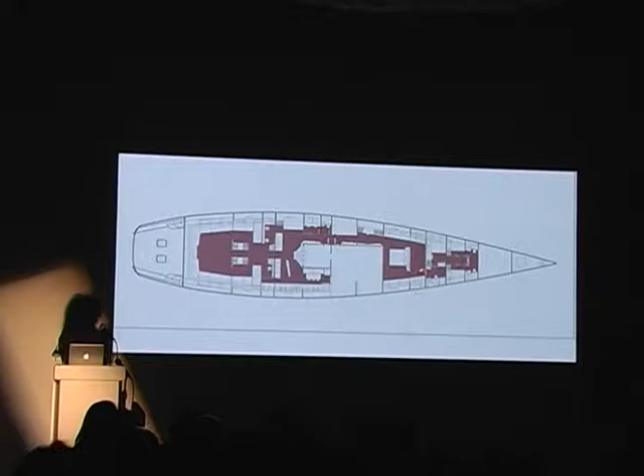Because what I don't like in a boat, usually, is the little corridors, turning and very narrow, where you have your body compressed inside. So I wanted to open the space inside. So all the furniture, all the cupboards of the boat are on the back of the body inside, and all the space is open.

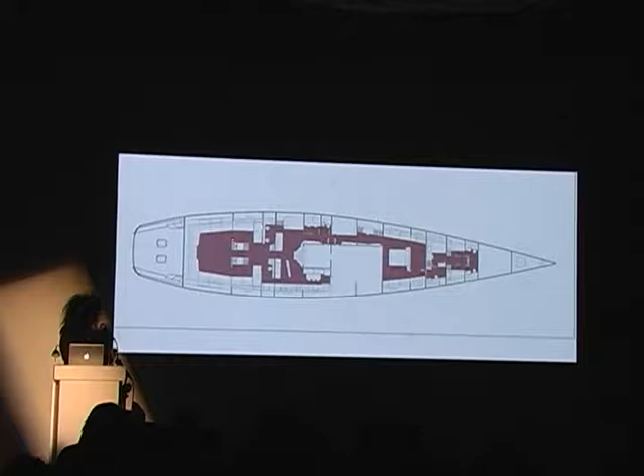We have the engine rooms here, the main bedroom here with the bathroom on the back, with the bathtub inside the floor, with fluidity and a sliding partition between. This is one guest cabin with a sliding partition inside this wall. This is the kitchen, with a sliding partition inside this wall. Another guest cabin is here, another one is here, and this is the salon, the living room.

You know, this is really, really, I like it. For me, it was holidays to work on that.

So I go back 15 years ago, when we did this installation in Grenoble in the Contemporary Art Center, an installation to express the way our architecture plays with space. So we called it Hypertension, because for us, hypertension is the way you play with compression or dilatation of the space.

We were playing with the ambiguity of being outside, going inside, and when you start to be inside, you don't know if you are already inside or if you are still outside, because of opening the walls, playing with the ambiguity of thickness and thinness, no, what can we say.

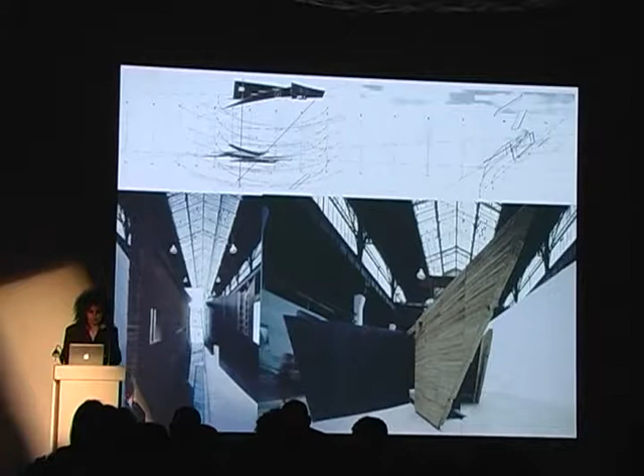So we played with that a little bit when we did this Banque Populaire de l'Ouest in '90, with this question of how to make a transition from the outside, which is the countryside outside the city. In front of this building we have fields and cows and a little river, and inside where people will be working.

So in between them we wanted to have a transition, and we had to resolve some technical questions. This facade is facing south, and people are working on computers behind. So we need to protect the people from the light, from the heating, because the client didn't want air conditioning, since it's outside in the countryside.

He wanted windows that open, to make people able to open the windows, to look out and feel the fresh air. So we need to protect this facade. We built a structure 2 meters before the glass facade, and this structure, which is seen from far and becomes like a forest of steel when you come nearby, is a gallery.

Inside this structure we have sunscreens which go down after activating a solar cell. Sorry for my English sometimes.

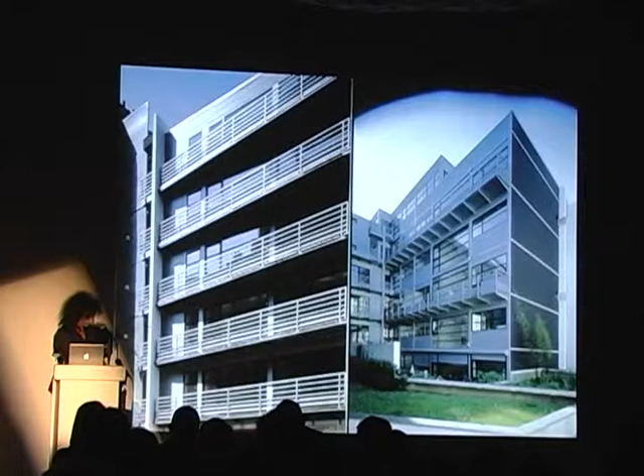In this little social housing building, it's social because it's very low price. We played with this question of having a space inside and outside. In this slide, this panel is perforated, and it's just the facade of the staircase.

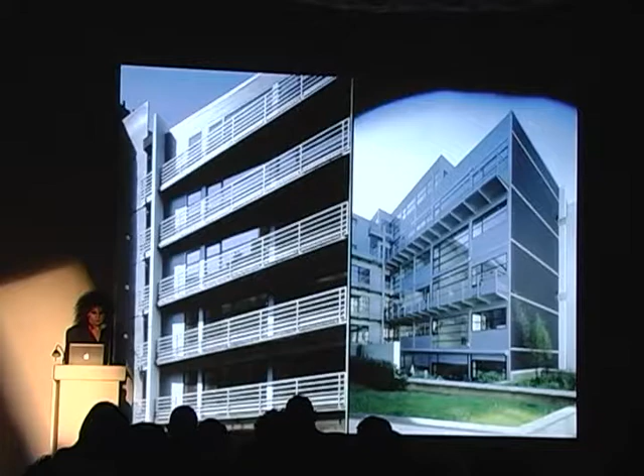When you go inside the building, you push the door and enter this little hall. It's little because it's a very small building, 11 flats, and the space of this hall is 6 or 7 square meters. But it seems bigger because of the curve, the mirror at the end, and the glass door to the courtyard.

But it's an inside space, because when you open the door, you go inside. Behind this blue column in the middle, you have the beginning of the staircase. The staircase goes directly up and behind this perforated steel screen, so it becomes an outside space. This space is inside, and at the same time, it's the beginning of an outside space.

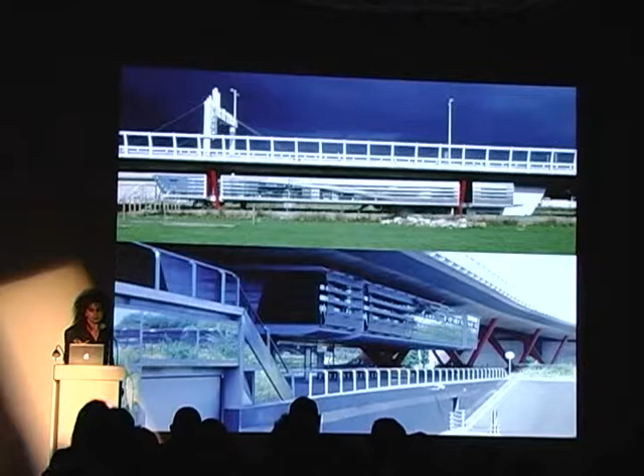This one is a control center. At the beginning, it was a competition for a motorway control center. This motorway goes from Paris to the west of France. This bridge is at the moment when the motorway, which is underground after leaving Paris, goes up to pass over the River Seine. So this is not a horizontal bridge, it's a slopey bridge, 600 meters long.

The site for the motorway control center was under the motorway, under the bridge, but it was supposed to be built in the middle of a public park. This bridge, an infrastructure of 3 ways on one side and 4 ways on the other, is supposed to cross in the middle of a public park, with children playing ball and people relaxing under the motorway bridge. That was the first problem we had. The second was that we wanted to preserve the public park and the view for people passing under the bridge, which is not so high.

So we analyzed the program and discovered that two-thirds of the building's program could be underground, because it's car park, garage, technical rooms, etc., without people working there all day. Only a third of the program was for the offices building. So we split the program into the part above and the part under.

In between, the space of the park is continuous. We proposed to redesign the bridge, because it was supposed to be very strong and heavy in concrete. We proposed to build it as light as possible for minimum impact on the park. That's why we have these steel arches with the same distance as originally planned, 35 meters long, and we hung the offices in between the two arches under the span of the motorway. We split the two parts of the motorway to let light come in between, to light up the parvis below and the facade for the offices on both sides.

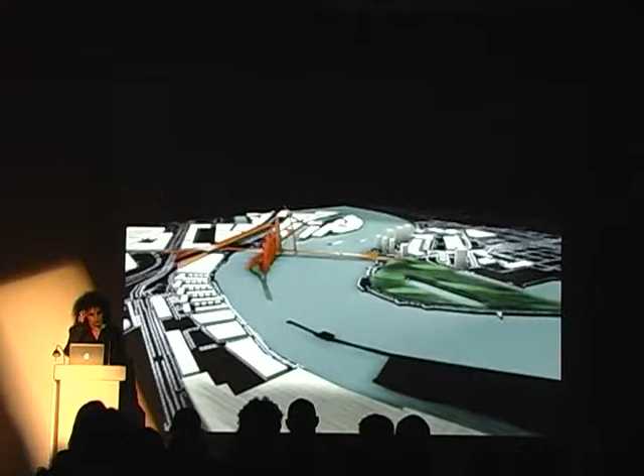This was a competition we did in '98 for the city of Rotterdam. At that moment, the city of Rotterdam asked 9 architects a single question: does the city of Rotterdam need to build a new bridge, a third one?

The city of Rotterdam has been established since the beginning on the north bank of the river Maas, because the south was the harbor. And the harbor, for the last 15 or 20 years, has been moving toward the ocean. So the free space now on the south is becoming a new city center, and they have to cross and pass over the river.

Because of this distinction between the city center and the harbor, they only had one old bridge in the middle. In '95 they built the Erasmus Bridge by Ben van Berkel, on the west part of the city center, and they had two tunnels. So they wanted to connect and link both sides more. We proposed a third bridge on the east part of the city center, to make a circle and create a better link between the two parts of the city.

But at this place the river was very large—600 meters, whereas elsewhere it's only 300. We discovered that on this south part of the river there were islands, from the docks of the harbor or natural ones, but not at this particular spot. So we proposed not only to build a bridge, but to build an island.

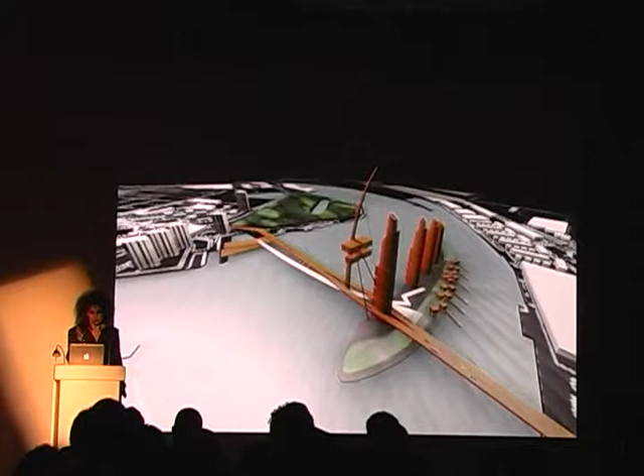We split the bridge into two parts. The orange one is for cars and the tramway, with a stop inside this tower in the middle of the river, and a suspended smaller bridge, a passerelle, for pedestrians and cyclists to reach the island. We also have to open the bridge for boat traffic, so that still has to be studied.

This is a very small building in the middle of a huge site in the north of France, and this huge site is from Arcelor, this steel company, built to create steel. All around the site, the buildings are very huge, absolutely ugly, like big boxes built without architects, painted in strange colors because decided by the wife of the director. Believe me, it's true. Sometimes buildings are 1 kilometer long, 30 meters high, but without architects, just boxes. One was painted in Blue Lagoon because the wife liked the Blue Lagoon, and another time it was maroon or brown, absolutely something ugly.

When they had to build the little one, an offices building, they asked me to build it as an architect. This is an offices building in the middle of this site, and I proposed to build it in steel because this is a big steel company. They said no, we want you to build it in concrete. I said no, it's stupid, you are the steel company, we have to build that in steel. So I fought with them at the beginning to build it in steel. This was a very strange situation for me.

So I proposed to build that with structural panels, 40 centimeters large and 7 meters high, strong enough to be structural and to support the floor in the middle and the floor on top for the terrace at the rooftop. These windows play, like in a partition of music, a concrete music, with these different panels. And in the middle, I inserted this glass box to have a hole and a volume, an ovoid volume inserted in it.

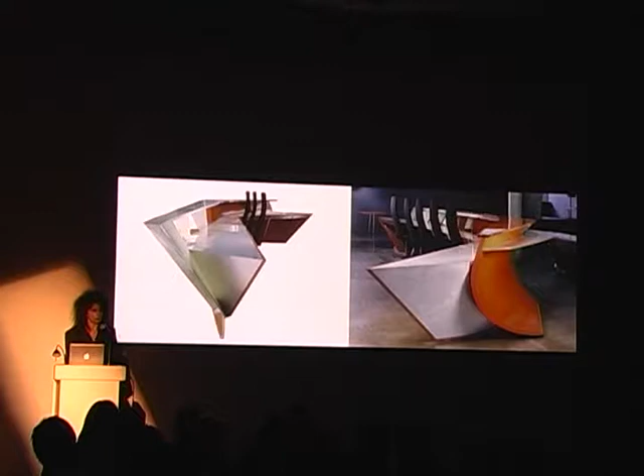But I discovered, when I came for the competition to change the phone box in the main hall of the UNESCO headquarters, that this building is absolutely incredible in its sensuality - you can feel the sensuousness of the concrete, how you can play with it. In the main hall you have columns that are sometimes starting round, transforming to rectangle, and finishing ovoid; the next one starts ovoid and becomes round. Every one is different. You have flying canopies in front of the entrances, 15 square meters of concrete, very solid, resting only on 2 little feet. Inside, the main conference room is exactly like entering under an Issey Miyake dress, but in concrete - split pleats in concrete. The ceiling, the walls, everywhere is pleated. This is really, really absolutely fantastic. So, to my shame, I discovered all that.

And I won the competition for the phone box because when I came in, I discovered the phone boxes were these little orange balls from the 60s, since the building was built in 1957. I said we don't have to change it because it corresponds well to the situation and the building, but the column supporting them was absolutely ugly. So I proposed just to change the column. They said, oh, and the director said yes, it's not very expensive, so you can choose this, architect. So I won the competition for the column of the phone box, and after that they asked me to propose furniture for the main hall. I was thinking I don't want to open a catalog - I prefer to design the furniture.

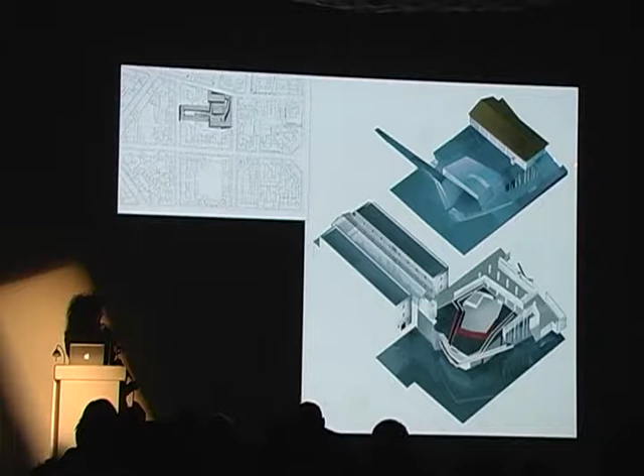Because of these different levels, we have another ramp going down into the foyer below, and we dig all the site at this level of the new entrance. We use, to the benefit of the project, the 12 meter difference behind the wall and the level below, to put all the program behind the walls, behind the facade that we have to maintain on this street and on this street. We just had the right to cut the facade at the corner to show a little bit of the new part. So behind the facade, we stay hidden and discover a new world behind.

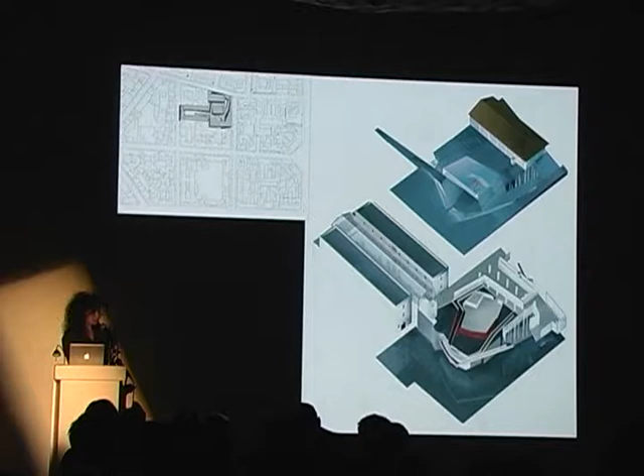In the middle of the foyer, we will have this conference room under the fontaine, because the fontaine is a glass surface. So with this animation, you will discover everything that I speak about.

Much more better, you know. It was supposed to be finished in 2005. We are in 2006, and now I say maybe 2008. But it's very fast for Italy, and it's very fast for my project.

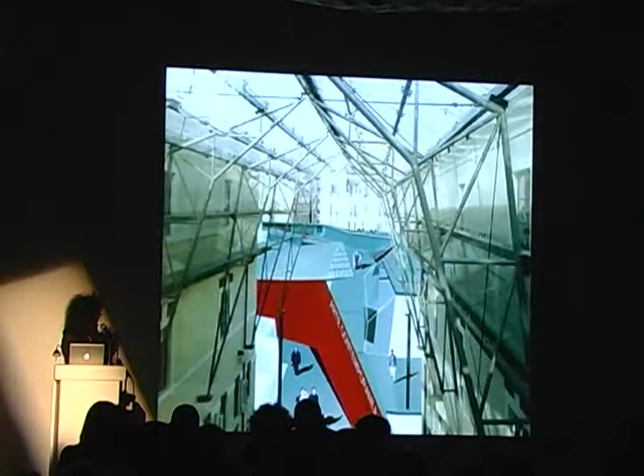So this is a glass art cafe that we propose. This is the first images we sent for the first step of the competition. And this is a terrace with a glass volume in the middle, with a surface of 400 square meters where the water will be running on it.

The art cafe will be there, because in Rome we have cafes in the streets. To come in, we will have to pass under the cafe, through the garden between the trunks of the trees, with the leaves on the roof, and come inside the foyer. The foyer has the fontaine above, which belongs to the two public parts: the square above and the foyer under.

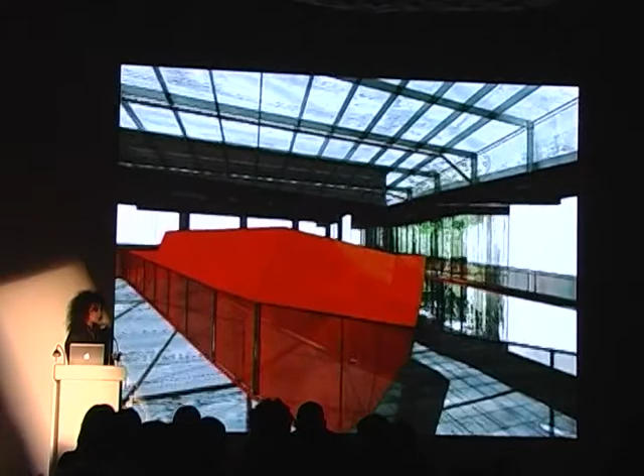The ticket room is a little bit like the furniture I did for the gallery, with one part lifting and the other part sliding, opening in the morning, with ramps all around at different levels to travel through the space, to discover art, and to be more open in this building, letting people discover the art. For the general public it's not so easy to go to a contemporary art museum, and we wanted to make the promenade a discovery, and to make them discover art.

Above the conference room we will have a lecture room under the fontaine, and this monolithic volume of the conference room is designed to seem a little bit destabilized, and we will dig the floor a little bit underneath to make this impression stronger.

The toilets, I will speak about a little bit further. This is important. This is a main exhibition room with a ramp and a passerelle running on the first floor to go to the roof, to have different points of view on the art exhibited, and the roof again.

All the surfaces of the roof will be a little bit oblique, to make people aware of their gravity, to put them in a more personal relation to the art everywhere. So all the surfaces will be a little bit inclined, not too horizontal, and the texture under the feet will be gravel, sand, stones, etc. So the perception will be with your body directly.

The toilets. I told you that I will speak about the toilets. The toilets are like a volume inserted in the building in one part.

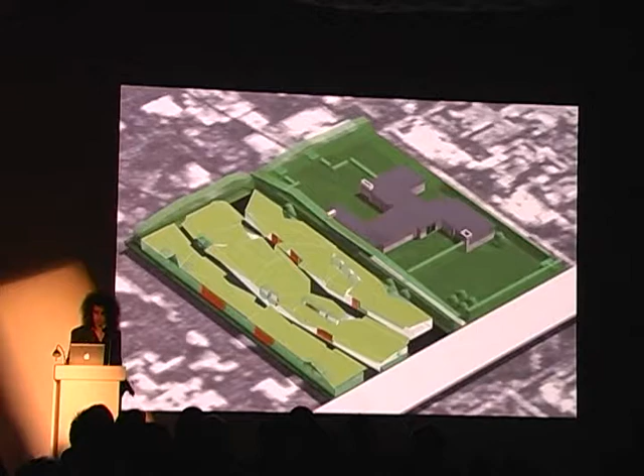This is a house that I'm building now in China, in Nanjing. It's a sort of collection, a sort of exhibition around a lake. We are 20 architects building a house around this lake outside the city of Nanjing. The program is to build a house of between 400 and 500 square meters, with 4 or 5 bedrooms.

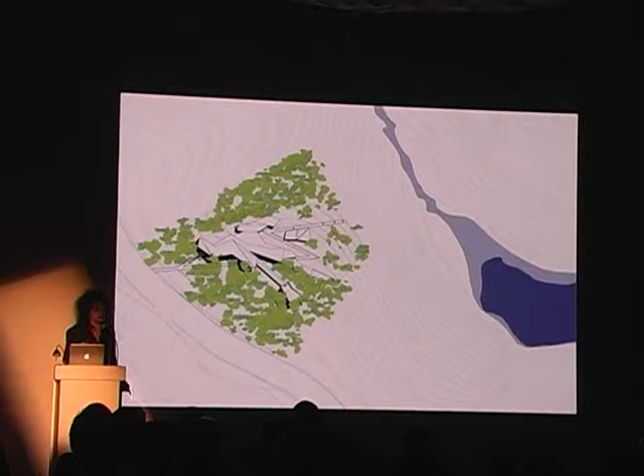We came all together on the site in 2003 and did a lottery to decide which site we have. I received number 10, and this number 10 is that one. It's a slopey one, very slopey, under trees, filled with trees, and it's a rocky one.

So I started to think that I wanted people who will rent this house to have an experience of space in each bedroom, and each bedroom will become a sort of rock on the slope. So I came back to the office, we built a model of the site, and I said we will build the Rolling Stones house.

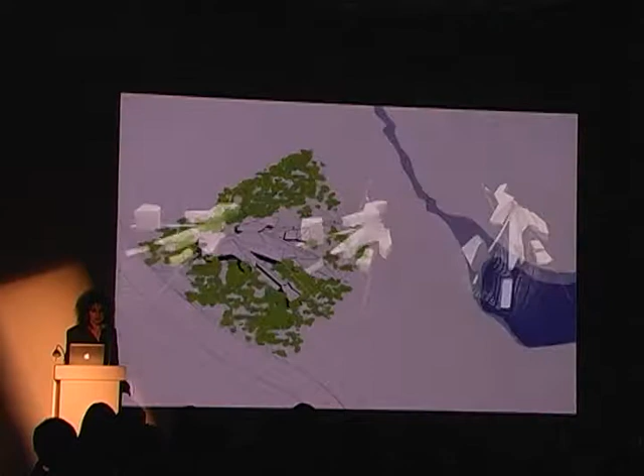This house is called Rolling Stones because every bedroom is a rock, is a stone, and every stone is a space. We have a tower 11 meters high, we have a sunken space, we have a horn, we have an S-suite, and we have a little belvedere, with a main space in between.

Some bedrooms are connected to the space, and some not. This one is isolated, you have to come out, and this one is also isolated, but you come in by taking this path rail at the first level inside this room.

And this tower is a game. This is an empty space 11 meters high, covered at the top by a roof terrace. When you come inside the bedroom, at the first level, you go by this path rail. You come in and you have a remote control.

But you discover that you only have a path rail, and your path rail goes to the end. At the end, you have a little window, but you can't go out—the path rail goes out, but not you. You have a staircase hanging on one wall, and strange panels on this wall, but you don't have anything else.

When you activate the remote control, one part of this wall unfolds and connects, and this fold goes to your path rail, so you can cross the space at the first level, enter inside the wall, with 2 staircases—one going down to the toilets, and the other going up.

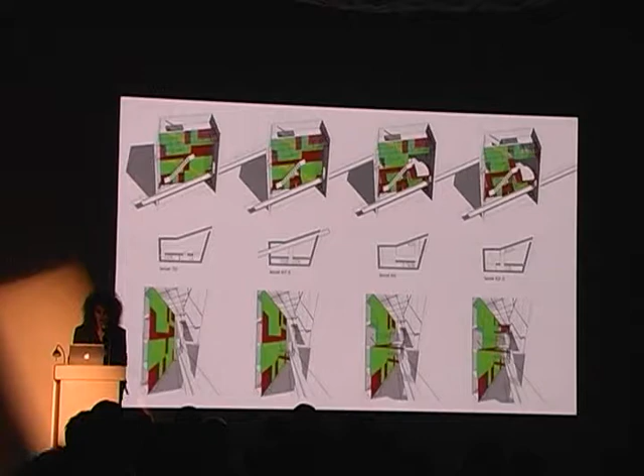And the staircase goes to the rooftop, and on the rooftop you can't see outside—you just see the sky, because the walls rise up above. So this is an enclosed vertical space with a play inside to unfold successively the different elements of your bedroom.

These are some renderings. We are on a very dark, shadowy site because we are under trees, and it's very warm and very humid. So I wanted to make it darker, and that's why I proposed to build it in dark granite, outside and inside, with only some surfaces in glass, looking and facing the lake, to be more experimental, with a little swimming pool on one part of the site. It's supposed to be finished at the beginning of next year.

This is a housing project I'm doing in Florence, Italy. This is a site between the airport of Florence and the city center, which is 15 minutes going from the airport to the city center. In between we have a site which was before Fiat, a site for this Fiat car factory.

Fiat decided to destroy the factory and urbanize the site to give the city a new area. It's very large, and it started to be developed 15 years ago on a master plan by Leon Krier. Leon Krier was doing the regulation and all the rules for this site, following the most conservative architecture you can imagine, with vertical windows, roofs, etc., with arcades on the street, etc.

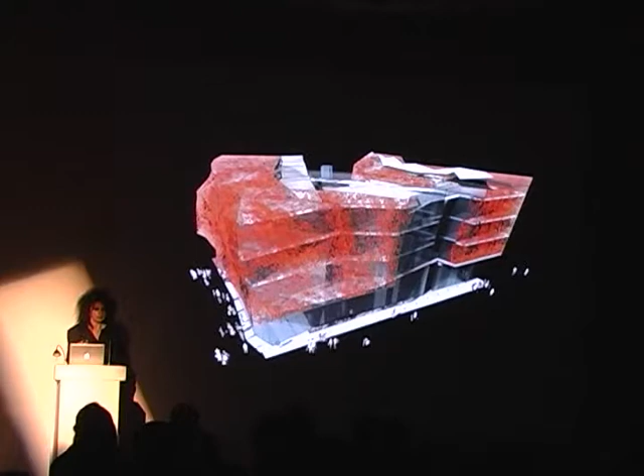It was forbidden to have balconies, but since it's a sunny place, I wanted people to have outside space for their flats. So I proposed to cover the balconies with a grid, and to plant specific plants that grow and flower red, because we were supposed to have red bricks. I thought maybe only the plants could be red, and that would be enough to follow the regulation. In winter it could be more open, and in summer it will provide shadow to the balconies. I received the building permit, and it will be built.

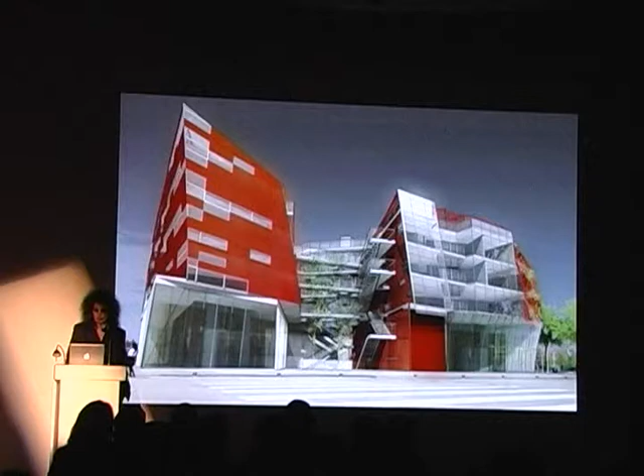So this and the other part of the building are covered with steel in red—since bricks are red, that's what I did.

When I came for the first time on the site, there was a big tree in the middle, and I was thinking of turning the design around the tree to keep it. But when I came to propose my project, I discovered they had destroyed the tree. So I maintained the courtyard, the open U system, and replanted some trees now.

Playing with the circulation and open corridors to connect the different levels and flats on both sides. This is a flat in Beijing that I did for the first architecture exhibition in 2004.

As with the houses in Nanjing, we were 10 architects in the same building, in the same tower under construction, each doing the interior design of a flat. We had exactly the same flat, the same structure, the same concrete walls, the same places for the bathroom and kitchen, etc. After building all 10 flats, at the opening, going from one flat to the other, it was absolutely different spaces, a different impression of space—we couldn't believe it was exactly the same.

So I called it flat unlimited, because I wanted to open it as much as possible.

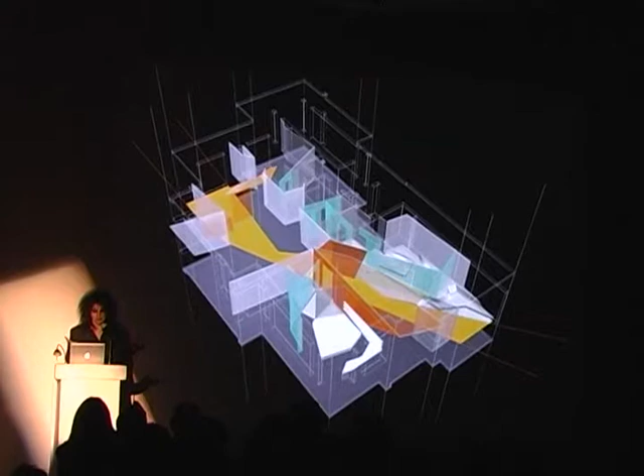This tower was supposed to have no openable windows because of air conditioning and because outside is very dusty, so it was forbidden. I wanted to open it as much as possible without opening the window, pushing the limit of the building's face to have surfaces going out. This orange diagonal surface goes out here without physically opening, but pushing the surface outside, and the opposite again. So I opened up all the spaces and didn't enclose anything.

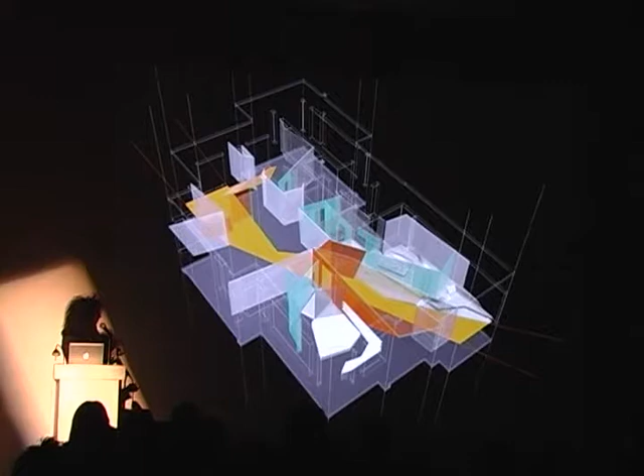Except the bed and the bathtub in the same space, with a sofa and TV outside. On the left, the bed and the bath, and on the right, on the other side of the glass, the table and the sofa.

This is another museum which was supposed to be built but was cancelled some months ago, for a private collector in south Austria, near Slovenia, 6 kilometers away. This is a very beautiful site, a valley surrounded by little mountains, with a village and a castle at the opposite end of the valley. At the opposite of this site is the museum site, with the village in between, surrounded by the valley.

This site is very strange because it's like a plateau lifted above the ground, with a 30-meter drop to the river, 10 meters to the fields, and 7 meters to the road. When I came for the first time, I was thinking I couldn't compete with an object against the castle at the opposite end of the valley. When I went to the castle, standing on the terrace in front of it, I was looking above the village toward the site.

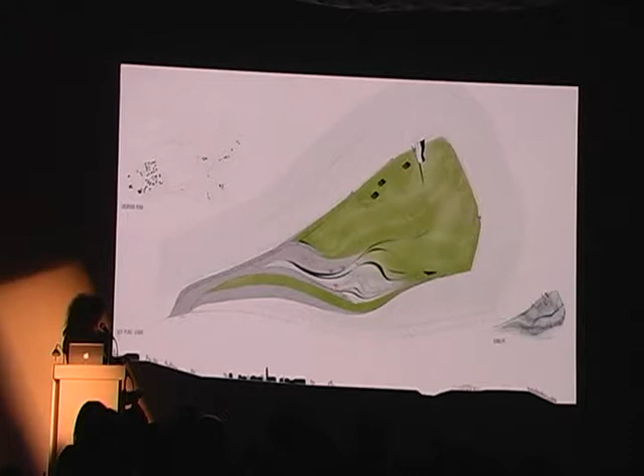So again, coming back to this plan, this curve was at the beginning very smooth. I put the perspective point from the castle here, distorting the curved line to make another sort of bending of the landscape, to show the entrance of the museum.

The site and the museum would have been the same continuous surface, with walking above, and under the surface a curved line the same in the ceiling, with a ramp on the border of the site, open to the view of the valley, the castle, the village, but facing south.

So to protect it, we built a wall behind to make the exhibition room behind the wall, creating this long promenade, slowly revealing the valley as you enter inside the museum.

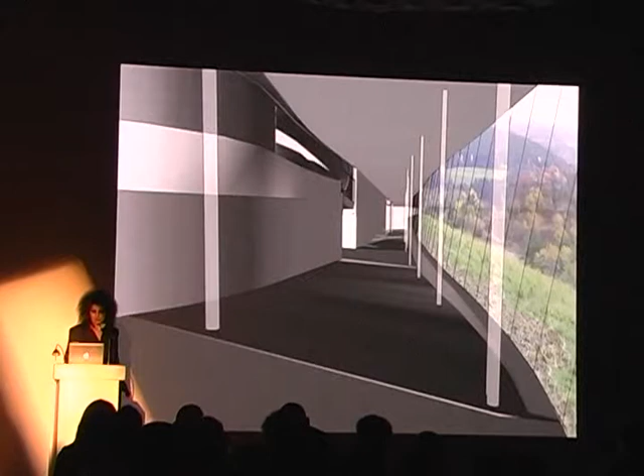Above, another ramp goes to the temporary exhibition room on the first floor. At the end, all the lines connect on a place with, inside the ground, a little point of natural light, like a small atrium.

This is a museum, another museum I'm doing now in Brittany. After the first bank I did 15 years ago, I came back to this same place to build this museum in Rennes, in Brittany. In France the regulation and the master plan are much more strict, and we have to fill the site.

We have to do a parallelepiped. There's regulation for the height, everything, the roof, etc. It's much more strictly followed than in Italy. When I played with the regulation in Florence, the mayor said, 'Okay, you can do that if you want.' But in France it's impossible, it's prohibited.

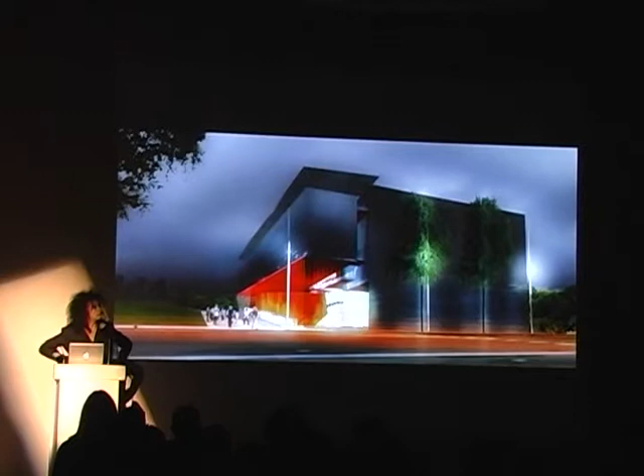What was interesting on this site was this piece of art in front of the building, a collection of 72 columns, 4.5 meters in height, done by an abstract artist woman from France—I forgot her name, I'll tell you when I remember. This is a very huge, very strong piece of art, and it was supposed to be on the site before the building.

So we had to take care of this structure, this sculpture, when designing the project. I proposed a very slight, smooth, simple facade in front of this piece of art, with a line in the middle of the facade exactly the same height as these 4.5 meter dark granite columns.

With this line we show the difference between the main entrance hall and the exhibition room above, covering the exhibition room with black steel and the main hall with black glass. In the night it will become transparent.

So in the day it will be an absolutely black facade, and at night it will become a red lantern, with red light inside, and the ceiling above the entrance in red, with the conference room inside. Because this is a very strict volume, I wanted to do something, so I break the volume with a diagonal.

This diagonal cuts through all the volume, the full height and length, going down to the storage room 11 meters below.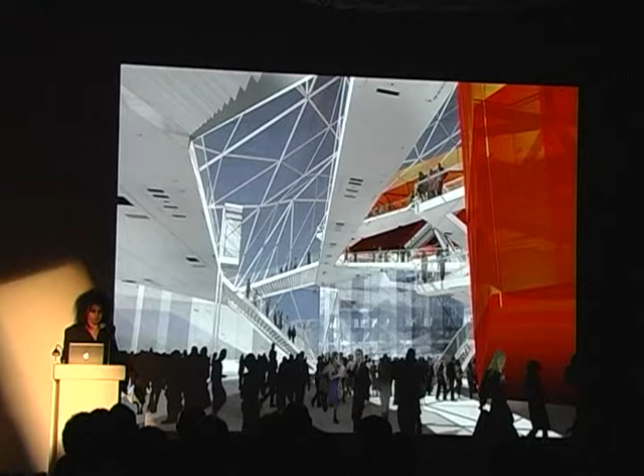But they chose a more normal square building than mine.

This was a competition in Lyon, France, for two projects - one for the renovation of an existing building with an extension, and another a new building. This is on the peninsula between the two rivers of Lyon, the Rhône and Saône. This peninsula was industrial, the harbor of Lyon, and we still have some docks and buildings there. This one was a building for salt, with boats coming right up to the bank. We still have on the river bank huge steel cranes, which are very beautiful structures.

So for the extension of this building, I proposed to renovate it and add a box, with a crane-like form emerging from the box, coming like a snake above the building, with a restaurant as a belvedere on top. But they said it's too much for a restaurant and maybe too expensive.

But I want to show the other one. This was a pavilion, at the end of this bank, just a few meters from the new building by Coop Himmelb(l)au, the Musée des Confluences, at the extremity of the peninsula, before the park.